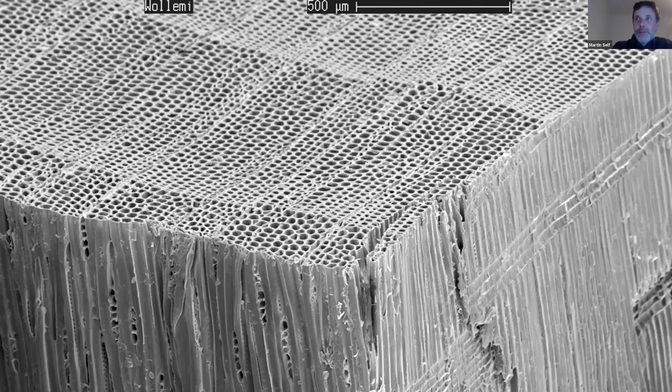I think we all know this kind of argument, the imperative to be replacing conventional concrete and steel construction materials with wood. But I think a reminder that we need to be careful about how we're doing that. This is a mapping of material flows in the European context of where wood growing stock ends up and the cycles it goes through, the potential for waste within that.

I think an awareness perhaps that as we industrialize wood production, there's a huge shift obviously in Europe and around the world towards that, that we don't make mistakes; the dominance of perhaps the glued materials risks reducing the later potential for recycling or reuse.

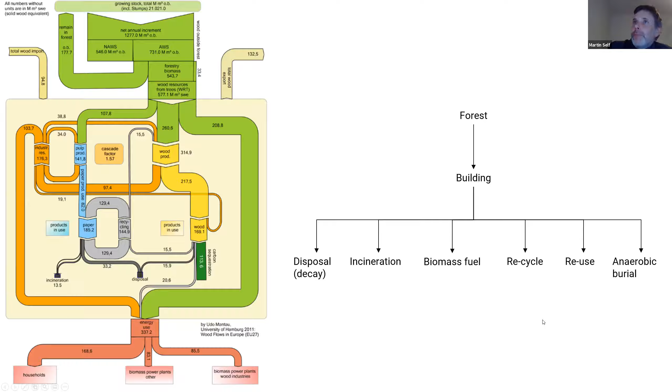I'm going to just talk a little bit historically, I suppose, some of my experience and just illustrate some points through that. So this was a project back in 2005. When I was at Arup, we worked on this with Siza and Souto de Moura. It was an early example, I suppose, of a parametrically developed, mass customized, robot fabricated pavilion structure.

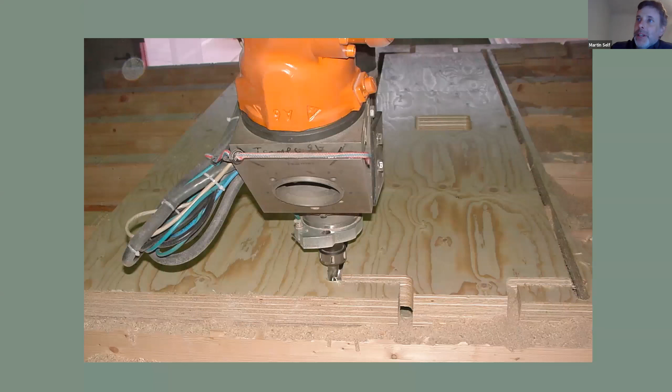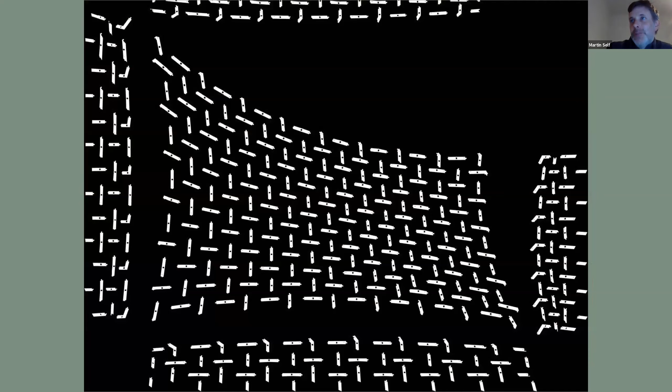So this was with Finnforest, now the Züblin factory in southern Germany, with the 5-axis machine cutting these shapes, each one different, each one taking its position within the structure. I think now quite familiar, but at the time it highlighted the potential of the marriage of the timber material and the approaches of the digital design. This was early days in parametric architecture tools and the marriage with the robotic fabrication.

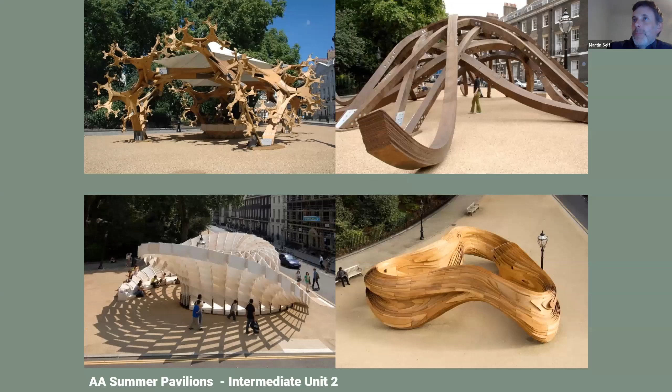That project brought me into architectural education in a way, and there was a series of pavilions we did with students, again deploying those kind of technologies, really pushing the digital design and the full control of a parametric model alongside CNC fabrication. And that brought us to this campus that the AA, the Architectural Association School, owns in the west of England, where there's a workshop and a little campus embedded within a forestry context.

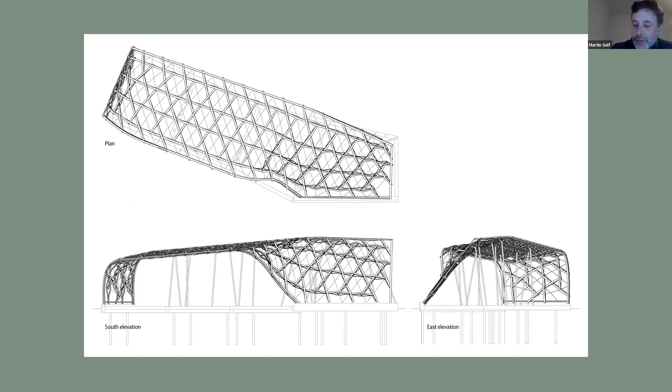There's an amazing precedent of using wood very intelligently. So Frei Otto, alongside Buro Happold and ABK Architects, worked on a series of buildings which demonstrated the use of the very immediately local roundwood in a highly technical application in the woods. That workshop we are then using for the projects with the students. So trying to think of other opportunities for bringing value to these low value woodlands.

So a lot of this woodland is of beech trees, which, amazing wood, great for furniture making, but do have good structural potential, very underused. At the moment, only really of value as firewood in the UK.

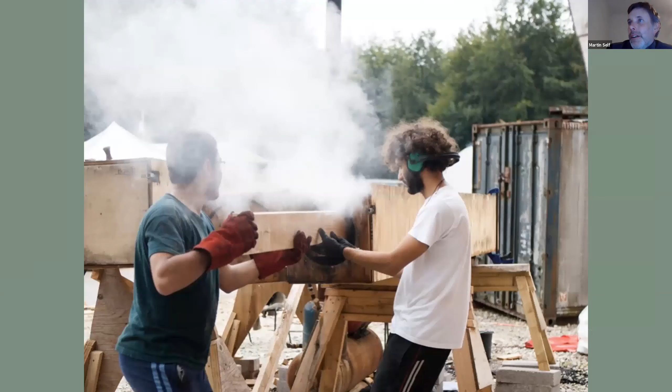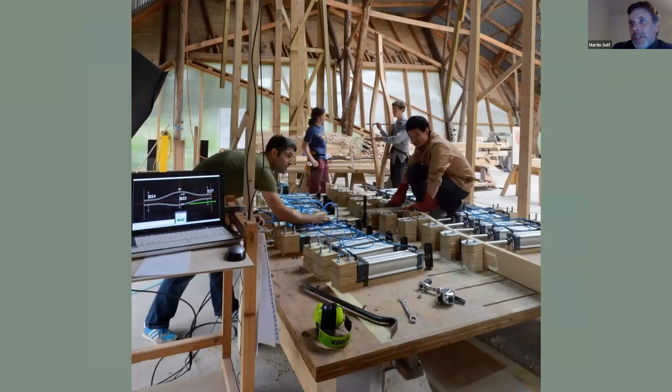Students got interested in steam bending, developed a steam bending jig that would allow variable forms to be made, so an integration between a digital model and the very hands-on process of forming through steam bending. This was the jig that they developed, allowing each of these differently shaped paired steam bent elements to be produced into this reciprocal structure that was assembled with some help, but mainly by the students.

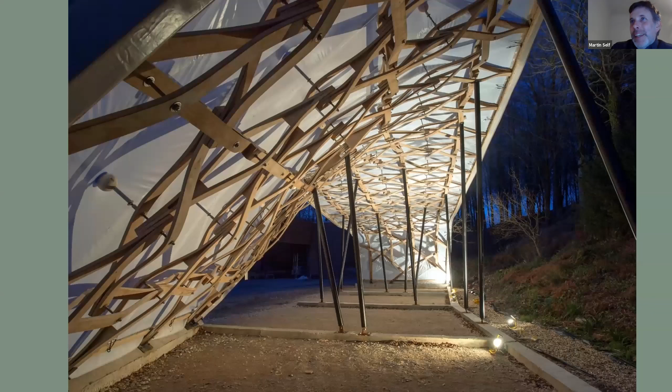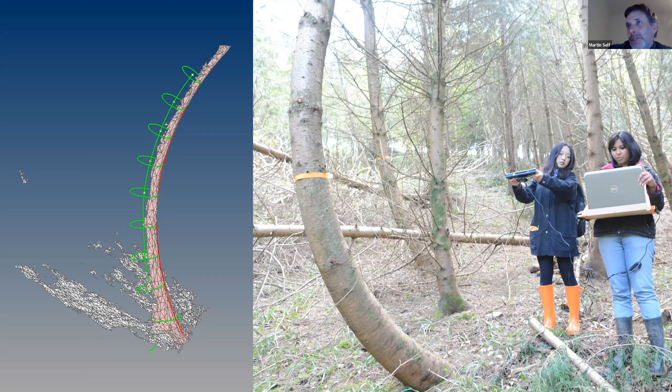The following year, having added curvature to straight pieces of wood, there's this realization that a lot of the trees had grown with sweeps, these basal sweeps, which had their own inherent geometric potential to be deployed directly in the architecture. So using very cheap available 3D scanning technologies, capturing those geometries, and then a strategy of composing that into an architectural form, a relatively minimal machining, but producing this geometry that was exploiting the inherent geometry

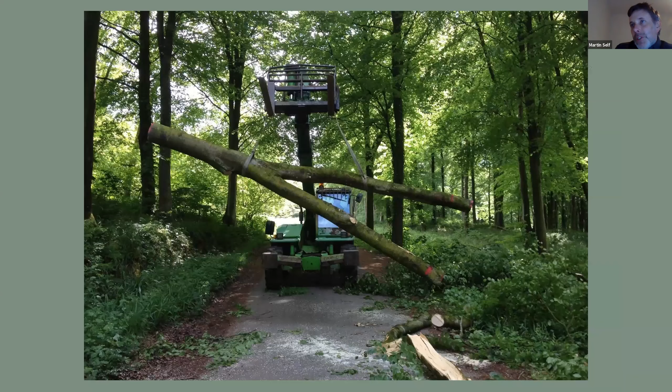of the tree. This is followed by this project, the wood chip barn, which really took a precedent from the history of shipbuilding and the use of the specific parts of the tree. So there's a focus on the forking element where the beech stem splits. Combining that then with the potential of the robotic arm, the generic robot that's able to machine very precisely its relative positions, and can work with the irregularities of the natural form, but still bring precision to the contact faces.

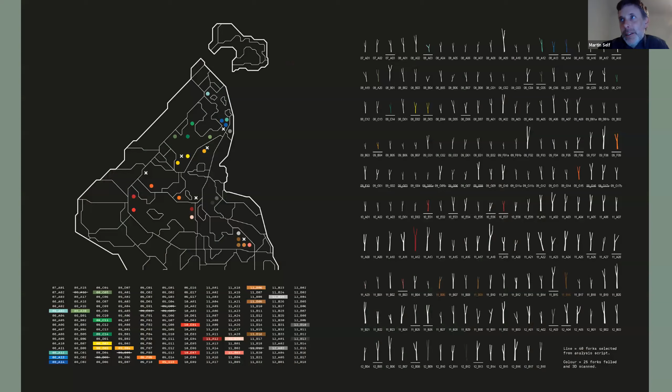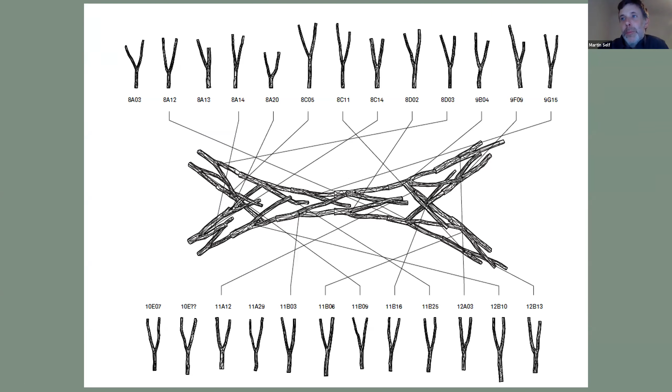So an exercise then of scanning, cataloging, more precise scanning, capturing with respect to reference points that would allow a manipulation digitally of the components and optimization to find the ideal structural truss configuration, mapping out the connecting points and the relative nodes within the structure, and then deploying the robot to cut the actual contact faces.

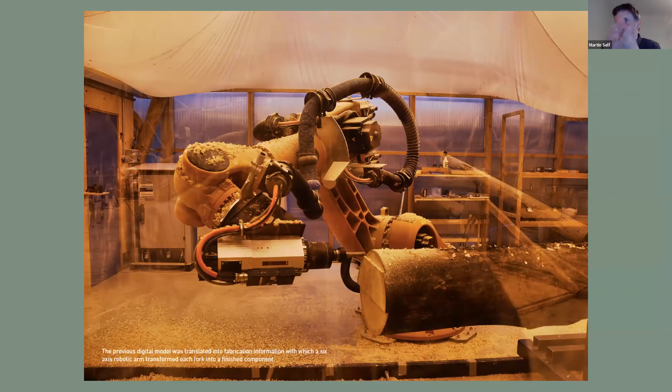So compression faces meeting these tenon features that would allow these fork elements to come together into this truss. So a combination of the irregularity of the natural form and the high precision of the robotic fabrication, and then assembling it into this arch, 25-meter span arch, and then its roof on top.

That provokes a concept that there's a potential with wood that we can go more directly from a non-standard material, which wood is, into non-standard architecture, rather than a redundant process of taking non-standard material, going to a huge amount of effort, moving it around, in the European context, between Scandinavian forests and German factories and UK fabricators into buildings, the potential of not having this process of going into a standardized product and back into something non-standard.

So I suppose it's maybe a provocation to think, maybe not just within the 20th century paradigm of industrialization and centralization, but to be thinking about how to work with the specificity of the material and the potential of bringing the technology more locally to the specifics of the forestry. So that was some of the academic work.

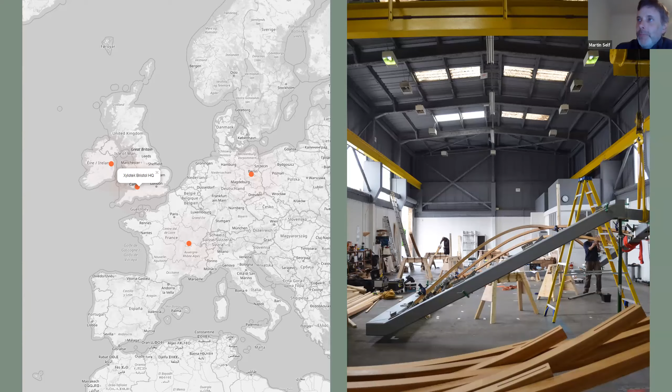I'll talk a bit about the practice that myself and some colleagues who I'd met through the teaching there set up 2.5 years ago. So we're based in the UK, but have a bit of a pan-European setup. Our MD is actually based in France, and we have people in Berlin and in Ireland. We have a medium-sized workshop in Bristol, set up to be doing some of the hands-on making, but working a lot with partners on the fabrication.

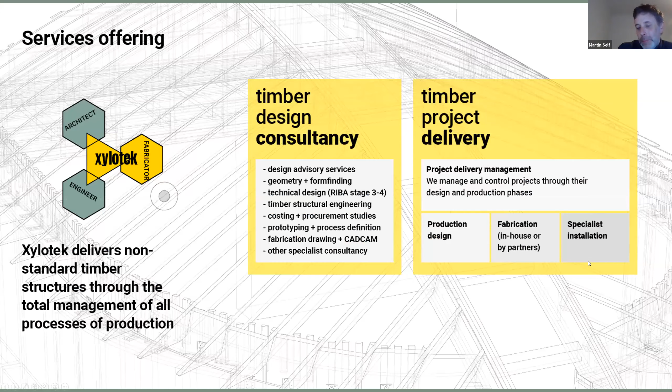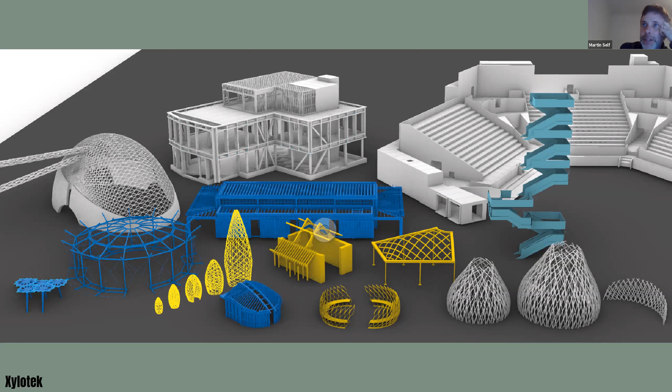We do some consultancy and early stage design work, some fabrication on the smaller and more complex stuff, some work where we're working with maybe a larger Central European fabricator, and then we're able to do some of our own installation. So we're working through all stages, but depending on the scale and complexity, doing different bits of it. The things in blue we've completed. The things in yellow we're currently fabricating. We've been working on the design consultancy side on some of those larger projects, and taking on this theatre project at the moment. A couple of staircase projects happening as well.

I said this a little bit already, but the way that we're working, we're really trying to work closely with architect and engineer and bring those together, bring knowledge of both of those and an understanding of the fabrication processes. So understanding the material well, alongside the technologies that can be used.

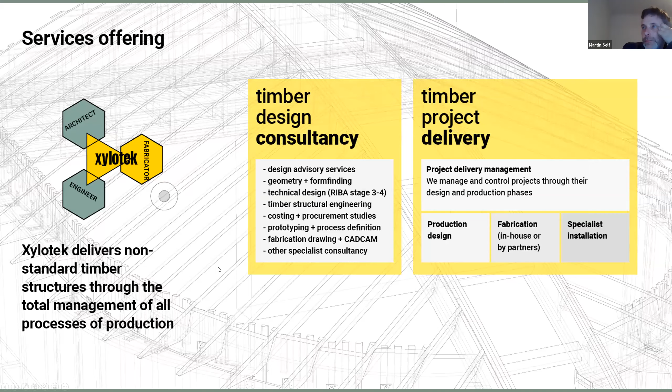I think this is maybe relevant to this discussion, a little bit about where the different types of companies, the different industrial players are within the European context. And some of the US context mentioned there, some of the same firms that Fane was talking about.

Like the UK is kind of unusual. It's got a history of working with wood, an amazing craft history, and there is a rich history in forestry knowledge, but there isn't a substantial timber industry. There isn't a major forestry industry, and there isn't a large timber fabrication industry.

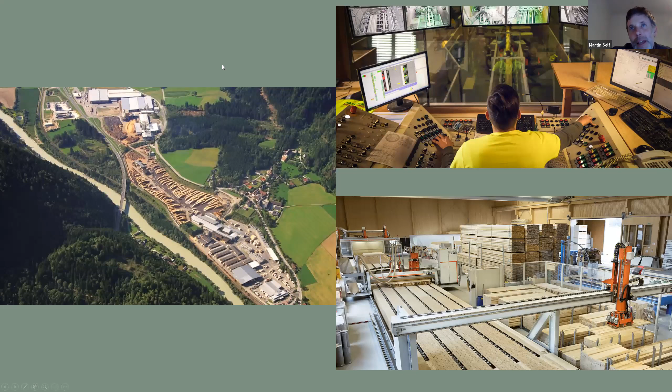So kind of different to the Central European firms like Hasslacher, who have huge forestry operations, many factories, really integrated forestry production of glulam and CLT and fabrication capabilities. Between them, I guess Blumer-Lehmann, Zublin, Arbonis, some of the French firms, very well set up with these huge facilities, the large Technowood or similar 5-axis machines. I think the kind of technologies you guys are probably talking about and thinking about how to really embed that scale of technology in a forestry context.

So several of those projects I was showing, we're engaged on the design side, doing the technical design through the early stages, working in partnership with a fabricator in Central Europe who would be cutting the pieces, potentially coming then to our workshop or straight to site, and us being involved in the installation, so doing the erection of the project. So it's an interesting model that's maybe specific to the UK, but maybe it has relevance in Chile as well. As it's growing its own industry, perhaps those partnership models are relevant as well.

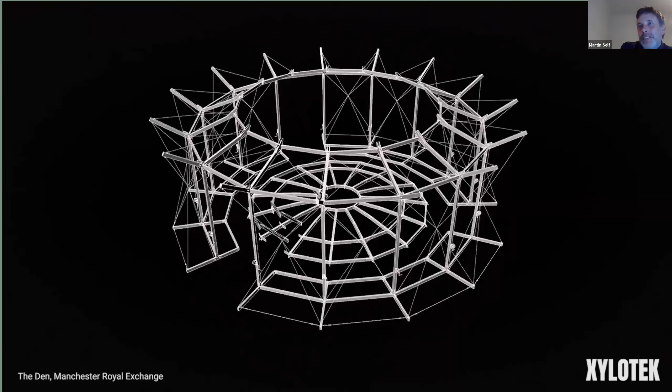A couple of projects. So an early one we did was this pop-up theatre, large glulam designed so that a community could install it, and this system of winches that allow this central part to be raised up. Does this video work? Yeah, so fun little project, working out a system mechanically for this little structure to be installed and dismantled easily. It had one outing before COVID, and it's now lined up to do some more over the coming years.

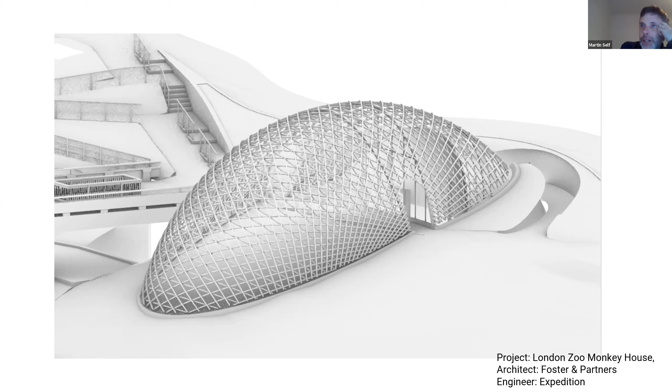We did some consultancy. This sadly isn't happening, but some consultancy with Foster's and an engineering firm, Expedition, for bamboo, a laminated bamboo grid shell structure. So working early stages, we're really keen to get involved early on in projects, to be engaged in a way that can inform the design work. So doing prototyping and testing at a very early stage.

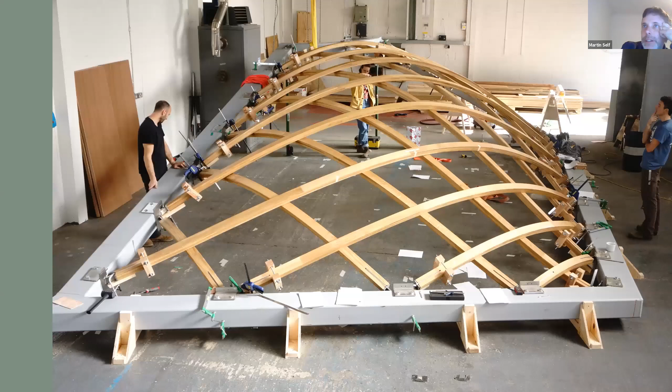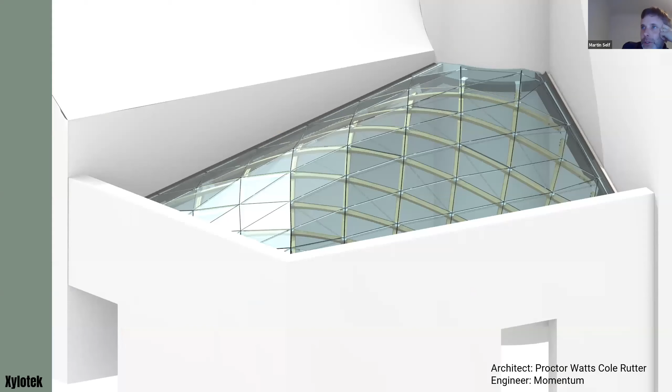This is a project which is actually being installed next week. Scaffolding's just gone up this week. This is it in the workshop, so pre-assembly of this oak grid shell. So the strategy here, a glazed grid shell, was to form find a good grid shell surface, a compression surface, then map geodesic lines. These are lines which can be made from straight planks of wood, and then building up these lamellas.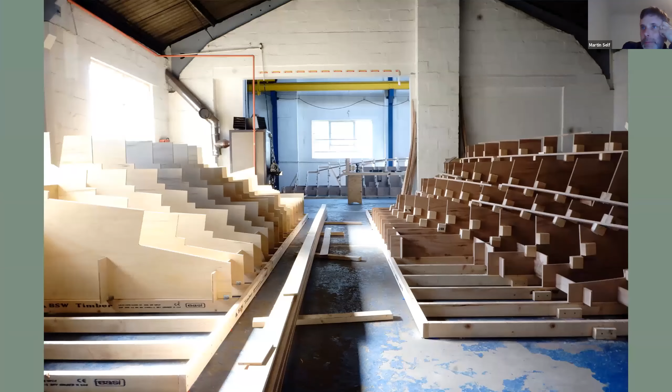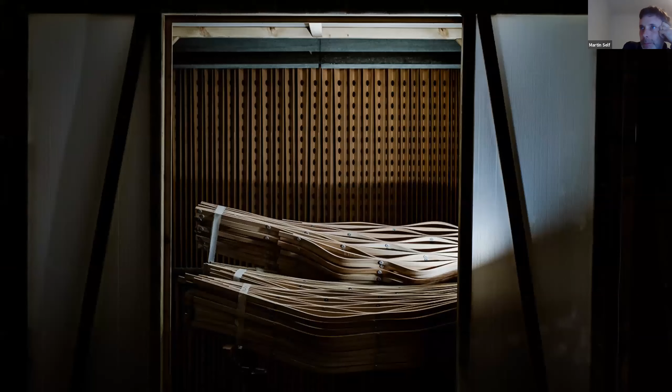So the jig work for that, each of those pieces being a different geometry, but each being glued up from straight lamellas that would just curve and bend through space to take up the forms in the grid shell. It's coming along. That was an Eastern European oak being used for that. This is just a little domestic scale project pushing the limits of how much you could prefabricate in CNC, a birch plywood project. And just as a last little slide, a teaser of a project we're working on at the moment. Again, it's just going into installation now.

Steam bent pavilion, lots of smaller and larger scale steam bent nuts. What was nice about this, it comes back to the immediacy of working with wood and understanding the qualities of the wood. On this one, we had the privilege of being able to actually go to the sawmill and identify individual logs that were relevant. Working simultaneously with an architect pushing things very heavily digitally in their form finding, and alongside that, working closely with the forestry in the sawmill and selecting the individual planks that would behave well when they're steam bent.

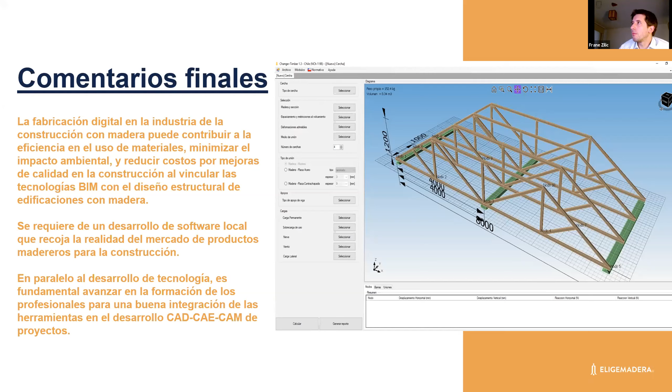Actually, I have a follow-up question for you, Martin. Who do you think should take the challenge of programming and controlling these robots that will do the manufacturing for us? So will that be some architect, some engineer, or some constructor, or a carpenter?

I don't know. And if his education level will be some sort of technical knowledge or professional or some sort of postgraduate kind of knowledge that is needed in order to get to the potential that is there.

Interesting question. Trying to think. I mean, I think it varies quite a lot, doesn't it, by country? I suppose what the sort of professional route is. Like I think probably in Germany or Switzerland, a lot of the route would be a carpentry training, and then some study in engineering or the technologies more directly, probably a typical route into that kind of world.

In the UK context, it's kind of different, probably partly just because of the economies of salary and the established industries. The people who are doing their full training in robotics courses are probably going into the automotive or aviation industries, where they're going to be attracting salaries that the timber industry in this country isn't. So I think there's definitely something about that. There's just a different status and more established professional basis, probably, in the Central European industry.